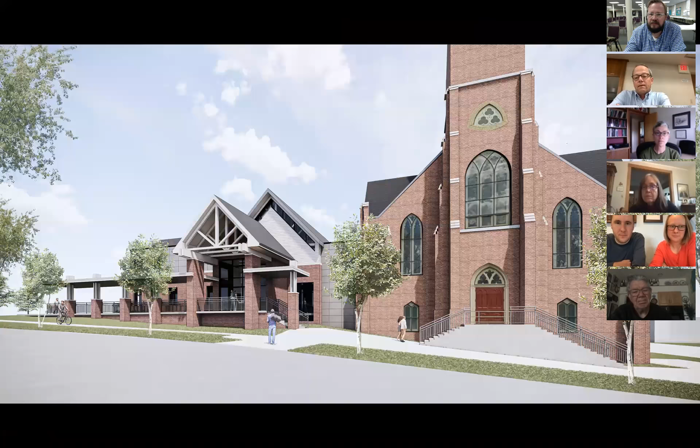So, long story short, friends, the idea here—Adrian, why don't you take us to the first slide—the idea here is that your sanctuary remains, the exterior of the sanctuary looks the exact same. That historic looking red door you see on the front steps, stained glass, those kinds of things look the same from the outside as they do today.

The goal is going to be to fortify the sanctuary inside: take away the columns, take away the wires, and protect the sanctuary space for the next 100 years plus, not the temporary stabilization we have now. In order to do that, if you think of that roof structure of the sanctuary being peaked, or gabled, there's that wood frame right now, and we've got our architect on Zoom here with us today as well, John Wellenkamp.

John, feel free to jump in anytime. But we've got to reinforce this thing with steel.

So what you're going to see in this rendering is that our interior ceiling comes down to flat to hide all of the steel reinforcements that are being proposed. Okay, so it looks the same from the outside.

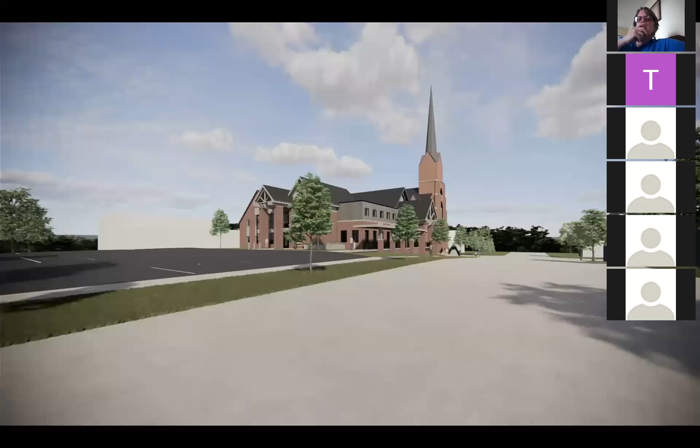What you're not seeing on those rooftops is our solar array, which would absolutely be there. Actually, a lot of south-facing roof line provides ability to expand our solar capacity if we chose to do so.

The historic looking sanctuary again remains the same from the exterior. That back wall of the office wing, that north wall, as it were, you're looking at currently on the right-hand side of your screen, that remains the same, as does the west-facing wall of the office wing. Everything else is, for the most part, new.

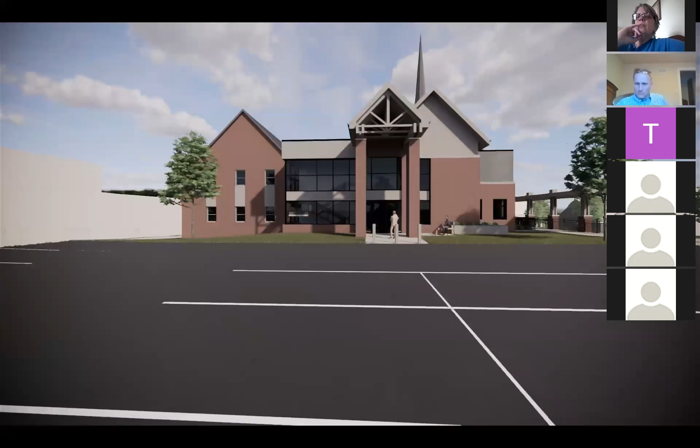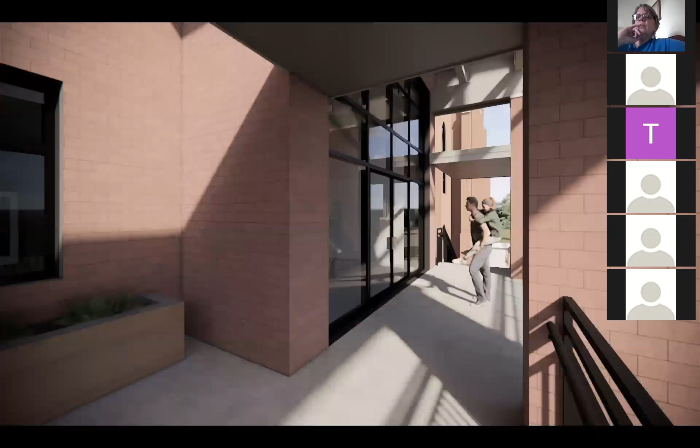Now we're going to go through into the narthex area. A gathering space for both before and after. You see, it's populated with some high vaulted ceilings.

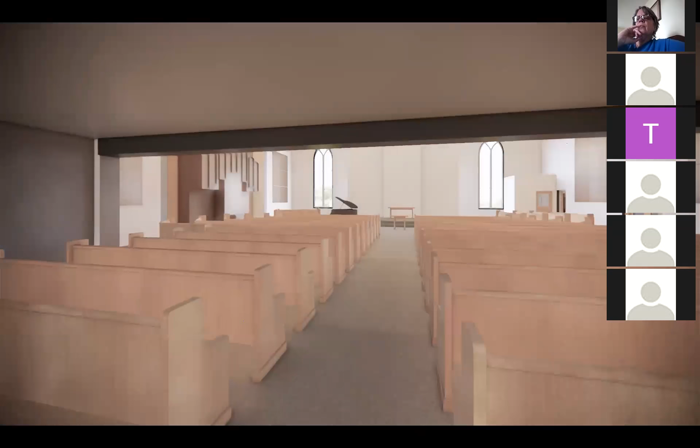What you're seeing now entering the sanctuary from the rear, you'll notice that we have, in this case, orientated the sanctuary 90 degrees. You see the roof design is now flat and lower than it currently is. You see the balcony has been moved to the west part of the sanctuary, and the organ is moved to the floor where it was originally.

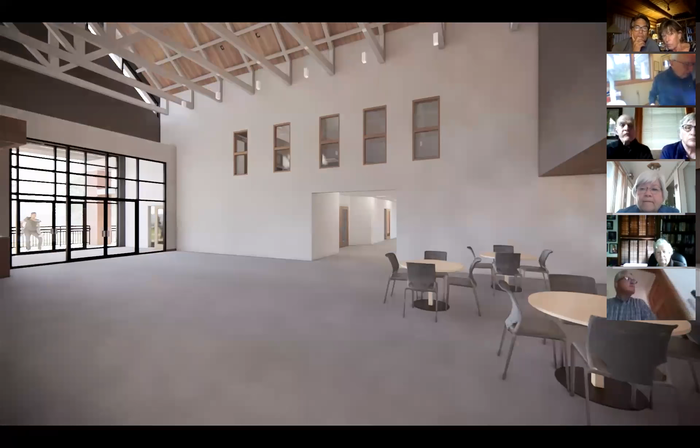You're not seeing things like the altar or any of those things in here because, again, that'll be up to a whole other group of folks to decide, how those things, where the placements are and that kind of thing. So just think spatially now.

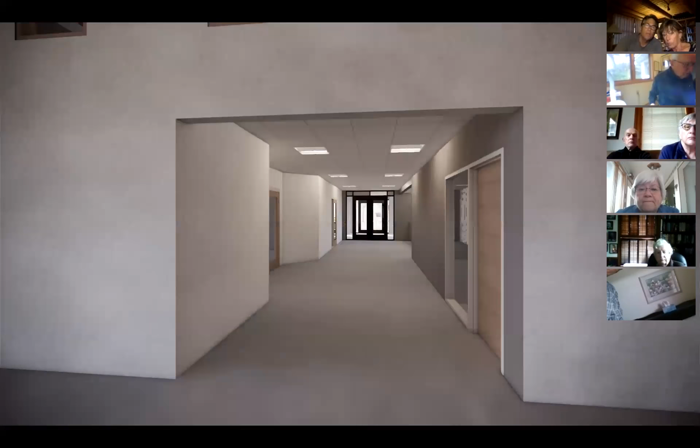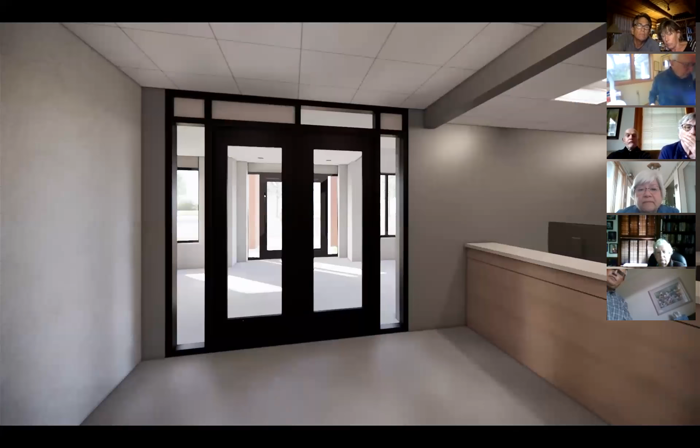There's a kitchenette in this area. This is where we'll host coffee. You have the nursery on the right, the fireside room on the left, a smaller worship space, office suite on your right, and library on the left here.

The elevator is in this space right here, right behind you as you're walking up the stairs. Walking up to the education wing now. So you can see the elevator entrance right there, right in front of you. So here you're thinking about dropping off your kids or your grandkids for Sunday school or kids ministries.

What you're seeing here, briefly, are classrooms and multi-purpose rooms for the younger kids area, 2 sets of bathrooms, and then this gives us access to the balcony.

You can see the narthex on your right, with vaulted ceilings in that space. The question's been asked why can't we keep the more traditional looking sanctuary. This is not to be confused with the aesthetics of what you're seeing here, it could be much different. But visualize bringing down that roof line to more of a flat, not vaulted ceiling, and moving the organ down onto the floor.

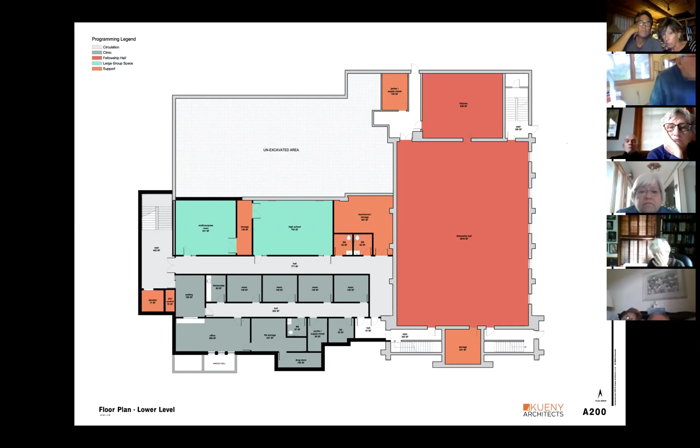Adrian, anything you want to add to that?

One of the real great things about this is everything's accessible. I have a high school student that's in a wheelchair right now, and all of our stuff is on the third floor. There's no elevator access, so this gives us that accessibility for student ministry.

Adrian, can you speak up, please? Sorry, you know what? Because I turned my volume way down, so I'm going to shout, and if I'm shouting too loud, you can tell me.

One of the great things about this, we have a high school student in a wheelchair that has trouble coming to events, or kids with mobility issues. Right now, on the second and third floor there's no access or accessibility. So one of the things I'm excited about is that extra accessibility to our ministries, opening the doors to people that wouldn't be able to come otherwise.

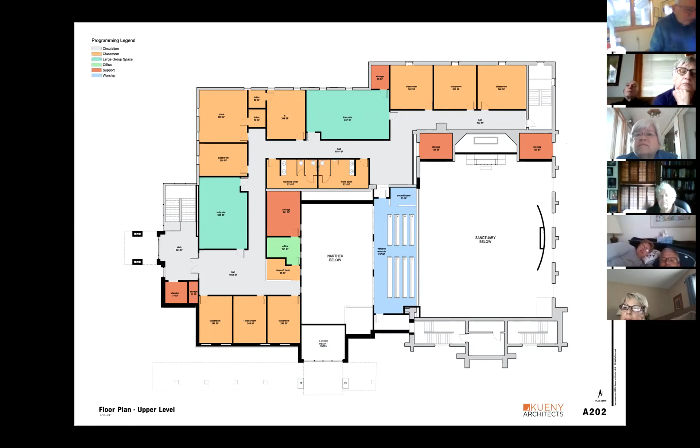Several questions come to mind. What's the seating capacity with the pews as shown? Are there 330? How much? 330. Oh, good.

Adrian, maybe we can go back to the sanctuary floor plan, please. One of the main reasons we're showing you a sanctuary that's been oriented 90 degrees is we're expanding the sanctuary to the rear, on the west wall. But we also get access to opening up those doors into the narthex to provide overflow seating for services, Christmas and Easter, and any time we need the overflow. So we just thought it made more sense that way.

Two other questions, if I may. One, as I understand it, the current education wing is going to be maintained, except new floors will be put in. I'm wondering whether the cost of putting in those new floors and rearranging all that versus just starting over completely, there must be some cost differential the architect could tell us about. And the second question, quickly, many of these rooms look a little small. I'm wondering if there's a plan to have dividers that slide so you could expand the space to open it up more.

Just a question. Two great questions. I'm going to invite John Willenkamp, our architect whose firm has designed and put this together, to talk a little bit about both of those questions. John?

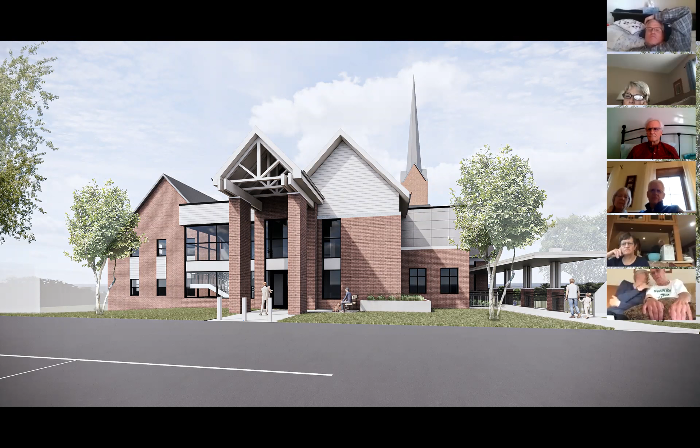If I may jump in on that same point, that portico or roof covering at the entrance looks awfully high, and I'm wondering if lowering that so it doesn't overwhelm the background and adds a little more protection, as Kevin mentioned. If you look at the south side entrance, you have a similar structure, but it's lower. For me, aesthetically, I think it would look better, but that's just my opinion. I'll shut up now.

No, that's a great opinion, Matt. Our design had looked at that after these were done, and I definitely would look at lowering that feature, bringing it down to more of a human scale on that side, and then we can get it to cover that drop-off lane, because that's actually a drive lane. So if someone would want to pull their car and let the passenger out, that roof covering would be right at that curb line. That's what I'm meaning — I'm not meaning it being fully out into the parking lot or anything like that. Great, thank you.

I'd like to speak, this is John speaking. I was wondering where the new addition that connects to the historic structure — what is covered up by that? Does it come up to cover the current door on the west side? In other words, what's the setback from the front of the church to the front of this?

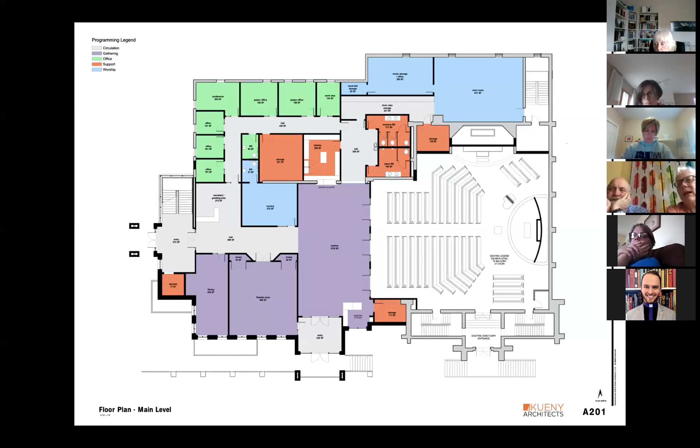Looking at the church again from the west side, the new main entrance, I like that there's so much glass there because it provides natural light. But I wonder if we could consider bird-friendly glass there, because that could really be a death trap for birds with that much light and window exposed. Question for the architect. Those are always things we will definitely look at and implement as needed.

I did confirm that where we have the ceiling right now is 22 feet 5 inches. And John, again, if I'm correct, that's out of necessity versus preference, correct? Correct, because it's a mix of the structural, and right now the little bit of cathedral you have is a north-south gable, and as we flip the church it's harder to look. But our goal is to create different planes within the main girders that can give you different geometries, so it's not a straight flat ceiling. That's why when you look at the model there are some panels in there, actually somewhat at a pitch, so it's not one straight flat ceiling across. As Troy mentioned, we aren't showing anything here that we're building tomorrow, these are just ideas to start the conversation of where we want to go.

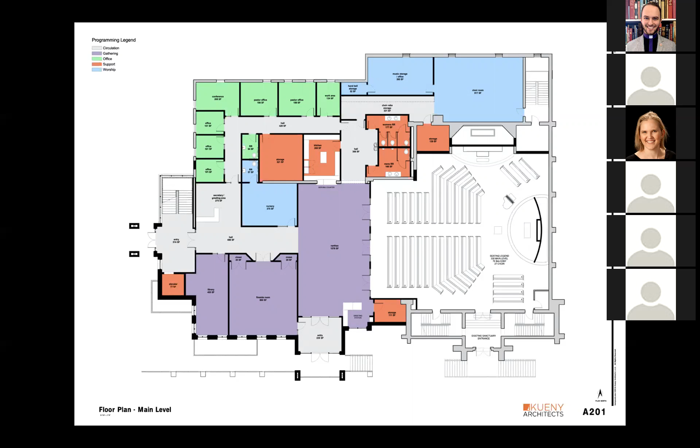I wonder if I can see the south-facing facade again—the Broadway Street facade. No, from the front. There you go. Well, no, I want both. There you are. I'm just brainstorming here.

Was there any thought given to making that less of a sharp triangle at the entrance to the new part, and making the arch more readily fit the kind of rounded Gothic windows on the old part? I don't know structurally if you can even do that, but you've got rounded Gothic on the old part, and then on the new part a very sharp A-frame in the extending roof that comes out over the entryway. Just a thought, just a question.

Thanks for your question, Carol. John? Yeah, those are all design features we'll take note of and implement. I think it's a great opportunity to rethink those pieces and tie them all together. And once we get involved with the city too, additional information like that will be built on as well.

Yeah, any other questions? Yes, this is Von Memphis. I just have a question. I imagine you've been able to address in a great way air exchange in this new setting.